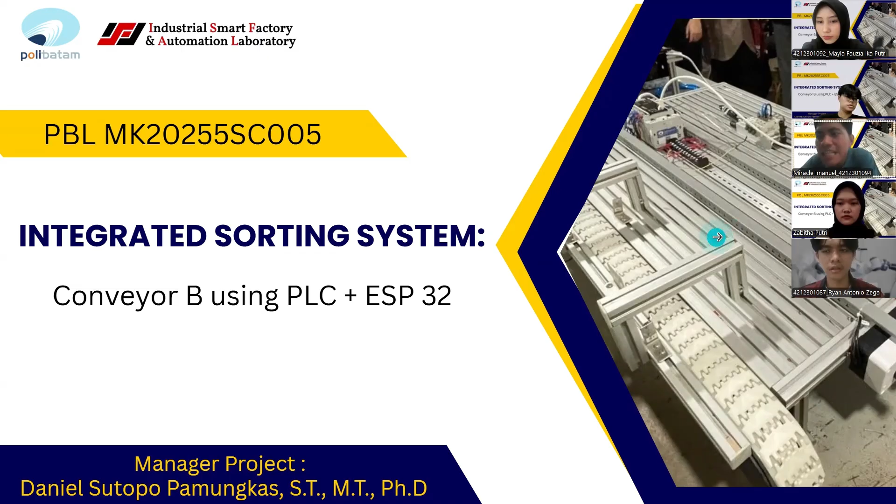We are from PBLMK 2025 5SC005, Conveyor B using PLC and ESP32. Next, these are the members of our team. The leader is myself, my name is Ryan Antonio Zega, and my partners: Zabitha Putri SD, Mechanical PIC; Mayla Fauzia Ika Putri SD, Secretary and PLC Program PIC; Miracle Imanuel Saragi SD, Electrical PIC; and Sargon Gandaniro Tambunan SD, PLC Program PIC.

All right, so before we present our project, we have to know what our project actually is. Our project is a smart conveyor system that combines PLC control, IoT connectivity, and machine vision to solve real industrial problems. As we know, a lot of traditional conveyors often run without operator awareness, rely only on manual sorting, and lack remote monitoring, which leads to safety risk and inefficiency, which is very dangerous.

So our system ensures the conveyor only runs when an operator is detected, sorts objects automatically by color, and sends real-time alerts to a smartphone via ESP32. By integrating reliable PLC logic with modern IoT and vision, it creates a safer, smarter, and more connected automation platform for future manufacturing.

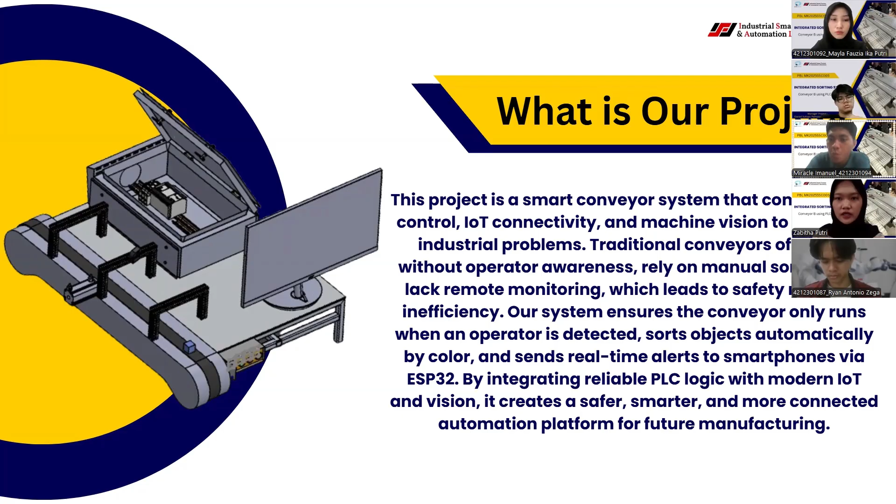All right, next is the objective. We have three main objectives in this project. First, we develop an automatic conveyor system controlled by a Mitsubishi PLC. The PLC we use is the Mitsubishi FX5U, and the controller is ESP32. Next, we integrate a webcam and smartphone for operator detection and color sorting. And last, we use smartphone control to enhance efficiency and reliability.

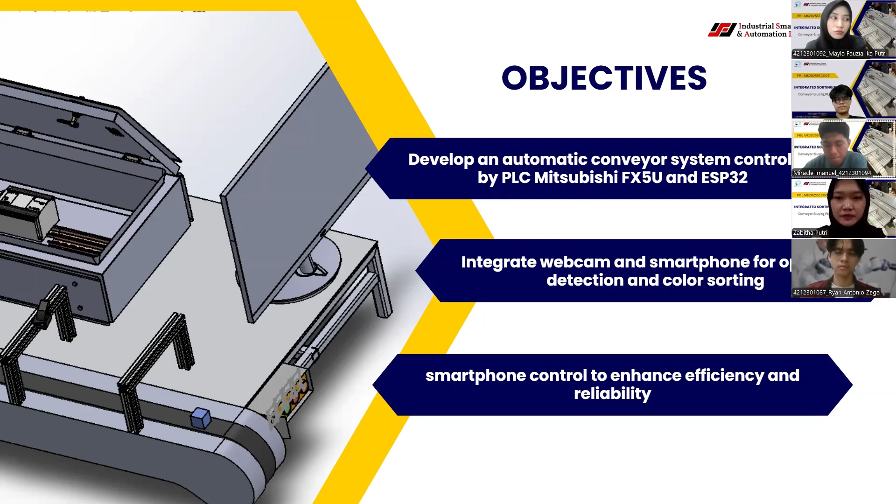All right, so this is the actual visualization of our project. This is the real-life project, the real-life machine, as you can see here.

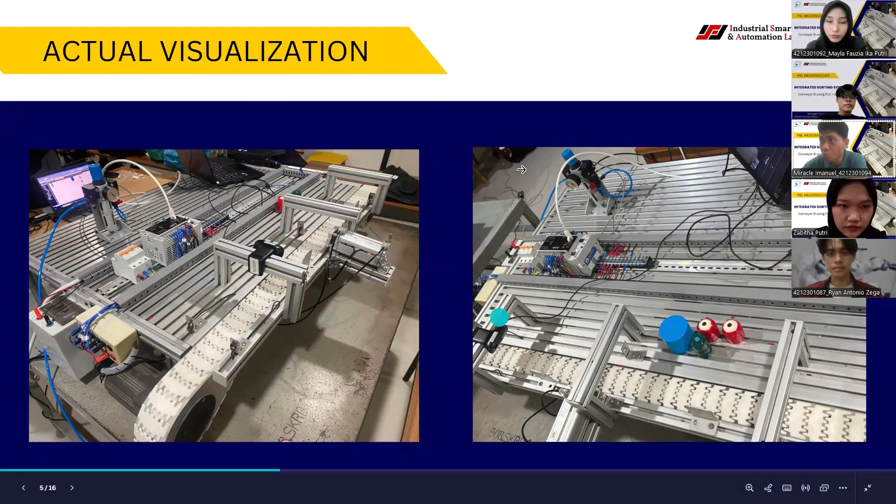Next is the mechanical design. Before we make the real-life project, we have to make the mechanical design first to make sure the real-life project is efficient. So here we already put all the parts, starting from the panel box, which has a lot of components like the PLC, MCB, etc., and the conveyor, the table, the computer, and so on.

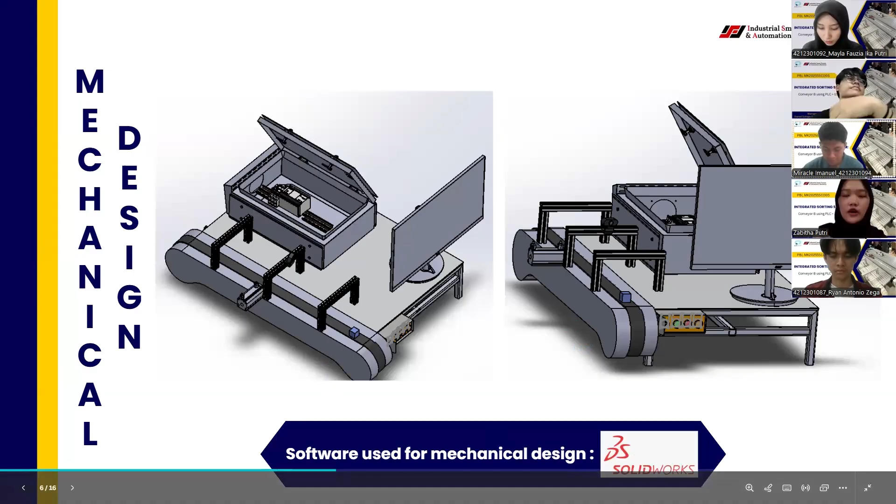The function of the mechanical design is to make sure there are no mistakes in the parts of the system, especially the shape of the project, so everything runs well. We make sure of the design first. For the mechanical design, we used SolidWorks as the software. All right, next it will be explained by my partner here.

Okay, thank you. Now it's my turn to explain the next part of our project, the component details. So this is our project. It has five main parts. First is the speed controller to control the speed of the conveyor. The first picture also has a terminal panel and the conveyor motor itself.

The second part is the solenoid valve, and the third part is the PLC, the MCB, and also a terminal block. Next, the fourth part is the panel box to control the tools of the project, and the last part is the webcam. Okay, next slide.

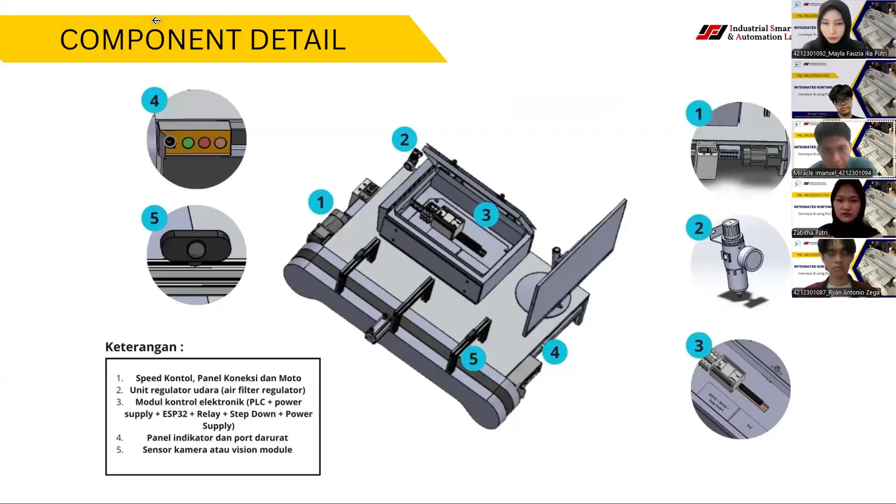So this is our electrical design, which I designed as the electrical designer. This design starts with a 220-volt AC supply. It goes to a one-phase MCB, and then it feeds the PLC and also the 5-volt power supply. We have the PLC, Mitsubishi FX5U type, then the ESP32 here, and we also have 5 relays here. Okay, next slide.

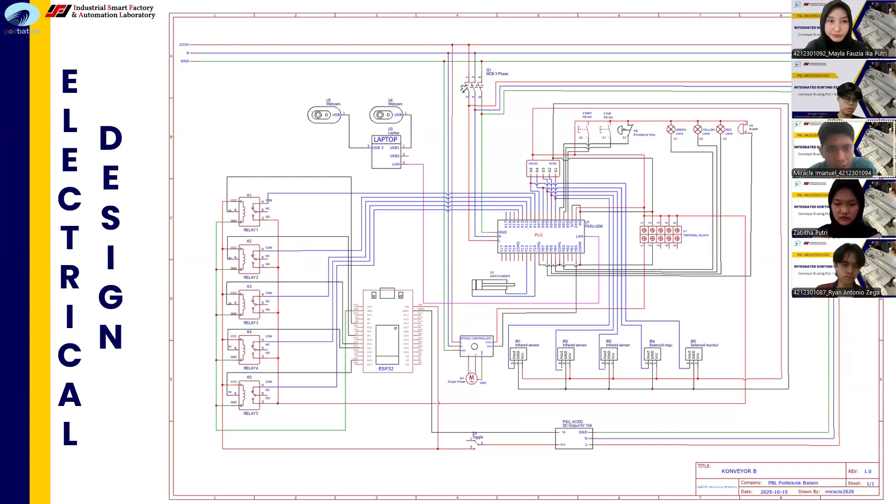So in this part, we are responsible for connecting all the existing components and ensuring that the Wi-Fi communication path between the ESP and the monitoring GUI on the laptop works properly. Next, please.

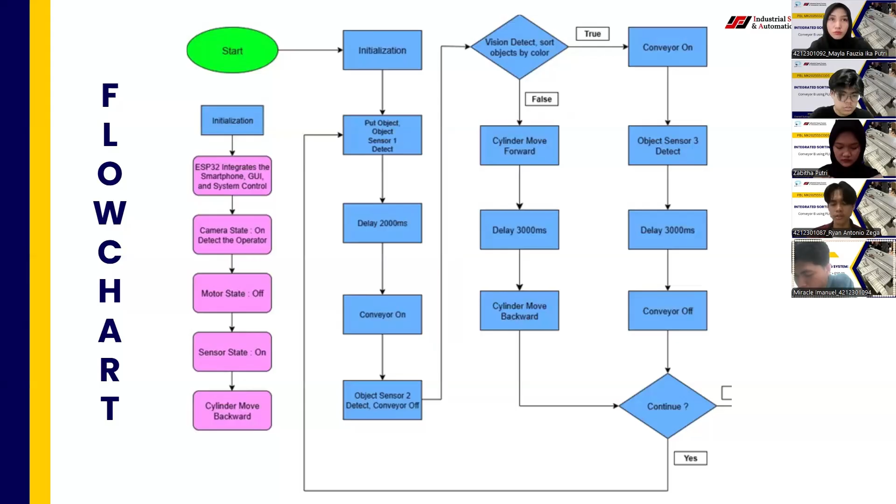If the object is red, which is reject, the cylinder will push it out. And if the object is okay, other than red, the conveyor will start moving again until it reaches the sensor 3 position, and after 3 seconds, it will stop. Next.

Okay, so this is our progress. The electrical, mechanical, and programming aspects have all reached 100% completion. Electrical work includes wiring, component installation, and system safety. Mechanical work covers the conveyor structure, supporting components, and pneumatic mechanism. And the programming includes the PLC control, ESP32 communication, and system integration. All parts have been successfully integrated and are ready for testing and demonstration.

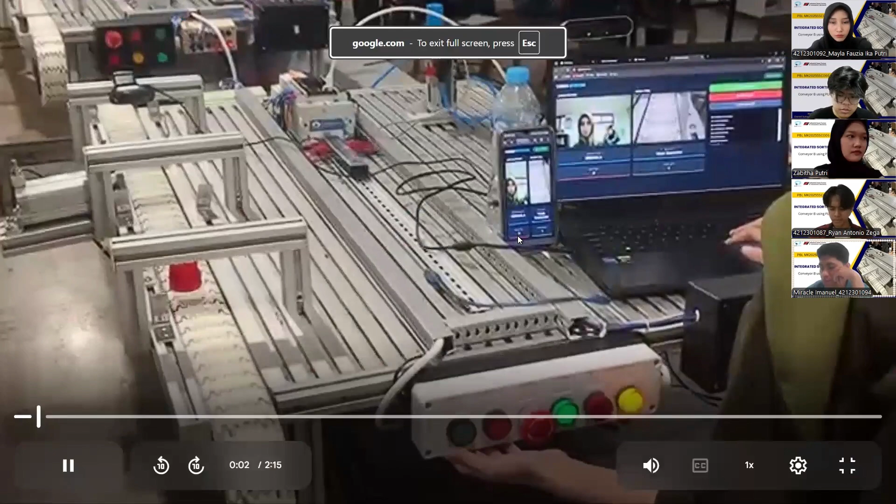Okay, thank you. This is my turn. These are the steps of how our machine works. It's controlled using a ladder program with GX Works 3. The demonstration in this video is like this.

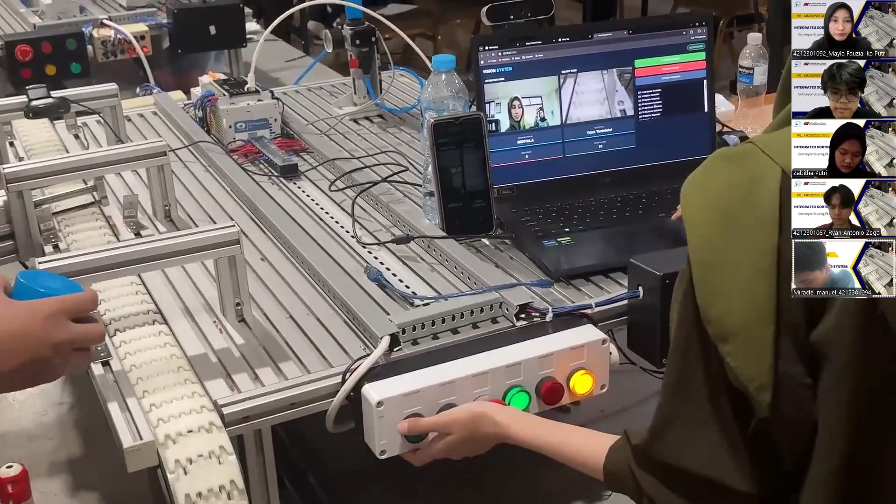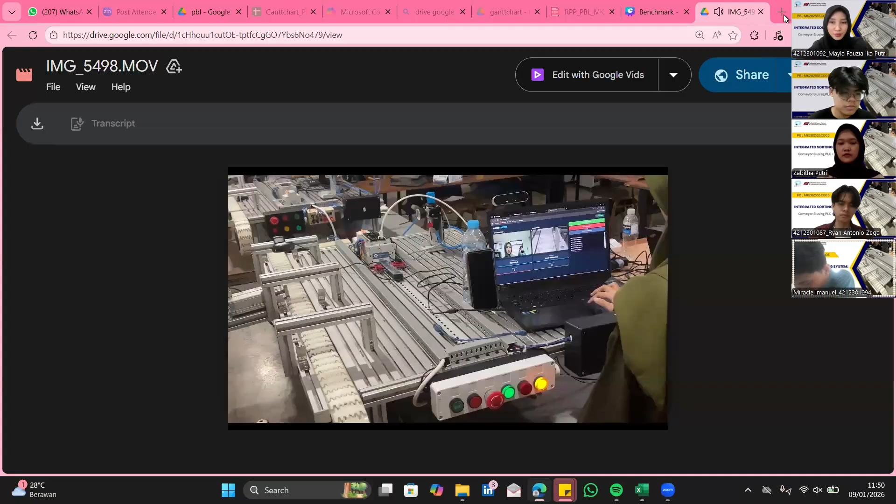Okay, the next video. This is from IoT. Wait a minute.

In this video, this is our system, a sorting machine. We use Python, index HTML, login HTML, JavaScript, and CSS for the monitoring and controlling system. For the IoT part, we use C++. The website can be accessed on both laptop and smartphone like this. And I connect the ESP32 to the main control, or Python, using the ESP32 IP address protocol. This is the demonstration video. Thank you.

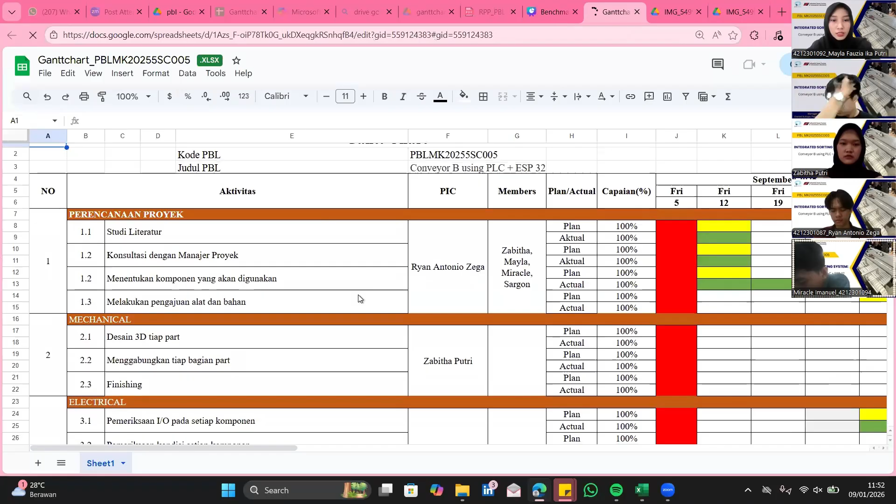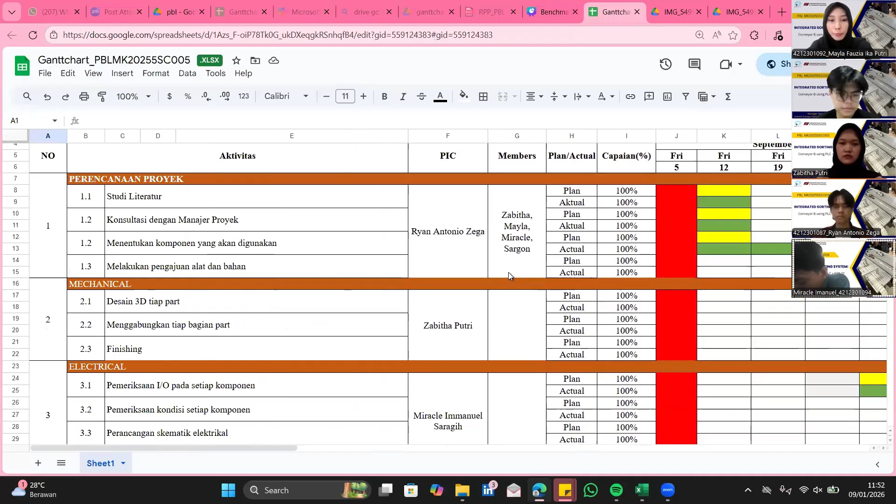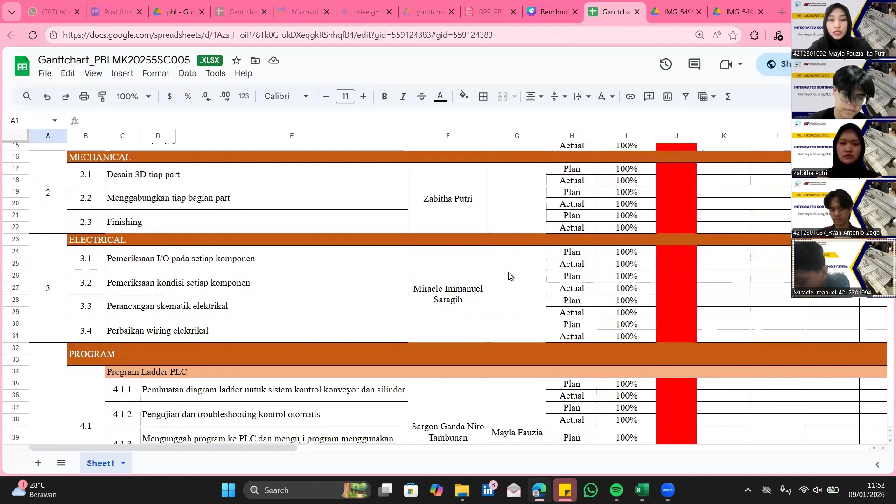Okay, so this is our timeline over 14 weeks. In the early weeks, the team focused on project planning, equipment definition, and preparation of tools and software. For the next phase, we cover the mechanical and electrical design, followed by PLC and ESP32 programming development. After the individual systems were complete, system integration was performed, including camera-based detection and smartphone control. In the final stage, the system was tested, validated, and documented before the final presentation. Okay.

Okay, next is the obstacles. During the project, several obstacles were encountered. Limited stock of consumable materials caused delays in wiring and assembly activities. In addition, some equipment was worn out or partially damaged, which required extra time for inspection and adjustment. Furthermore, the project schedule was not always efficient, making it challenging to coordinate project activities within the planned timeline. Despite these challenges, the team was able to adapt and continue the project until completion.